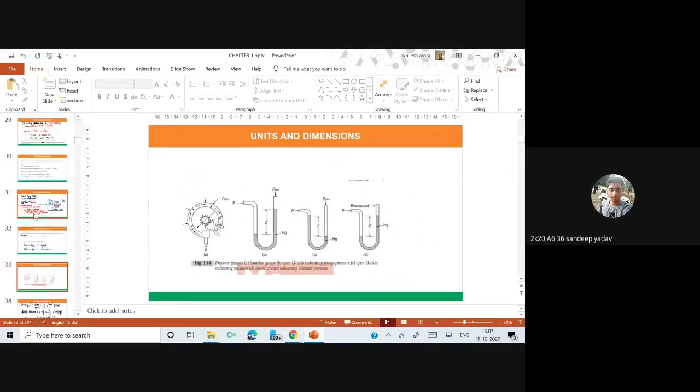Okay, so this was the question actually. I think we left here only, isn't it? I think so, I am audible I think. Yes sir, okay. So this was the question.

So basically what we have to do is calculate the mass, and we have to use the equation PV equals MRT. This is the equation we have to use.

Now the question somebody asked was, shall we go for 20 bar, or should we take the absolute pressure? This is the gauge pressure. Shall we take absolute pressure or shall we go for gauge pressure?

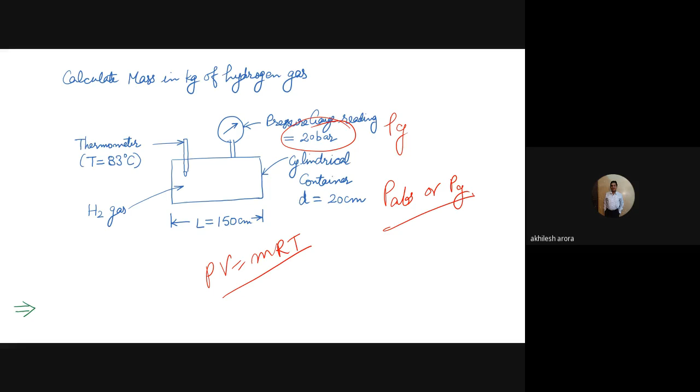Now suppose if I am having this particular container and the gauge shows a pressure which is equal to 0, then what is the pressure inside the container? Atmospheric pressure, 1 ATM. It is atmospheric pressure.

So would hydrogen be there inside the container or not? Yes sir, it would be there. So that means when the pressure is atmospheric, the hydrogen would be there. And there is a pressure of the gauge which is showing 20 bar, so in totality you can say the total pressure is 21 bar. So we have to calculate the mass of the hydrogen for 21 bar, not for 20 bar.

Because at 1 bar also... sir, 21 bar? Why sir, ATM, 1 ATM pressure we have right? See, I am just giving you an example, actually I will be taking the exact value when I solve it.

Okay, so let us see now. So we have to go for 20 bar plus 1 ATM, that would be 21.01325 bar. Okay, so let us see how we are going to solve it.

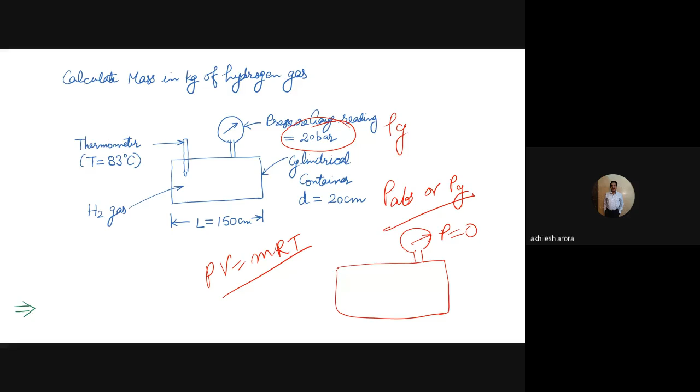Now this is once again, I have written this question, so you can see we can use this particular equation. You already know about it. And then this is the relationship for the mass.

So first of all, let us calculate the various parameters or physical properties involved here: pressure, volume, R, and T. Absolute pressure is given by atmospheric pressure plus gauge pressure, so 20 plus 1.01325 bar gives us 21.01325 bar. That is the total pressure inside the container.

Then if I convert this value into kilopascals, I will have to multiply this value by 10 raised to power 2. So it gives the pressure as 21.01325 into 10 raised to power 2 kilopascals. I hope this part is clear to you. So we have calculated the pressure now.

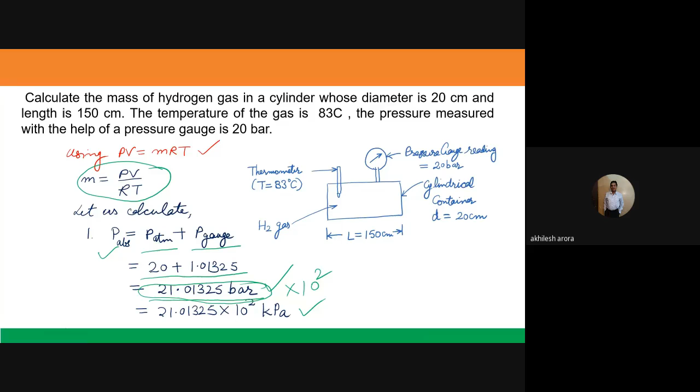Now let us go to the second part, which is the volume. I know what the volume is. Volume is pi by 4 d square into L. This is a cylindrical vessel, so this will be the volume.

So you can put the values: 22 by 7 divided by 4. This is the diameter, 0.2 into 0.2. The diameter is 20 centimeters, so you can divide by 100, that will give you the value in meters.

I think somebody is trying to join. Just wait for a minute.

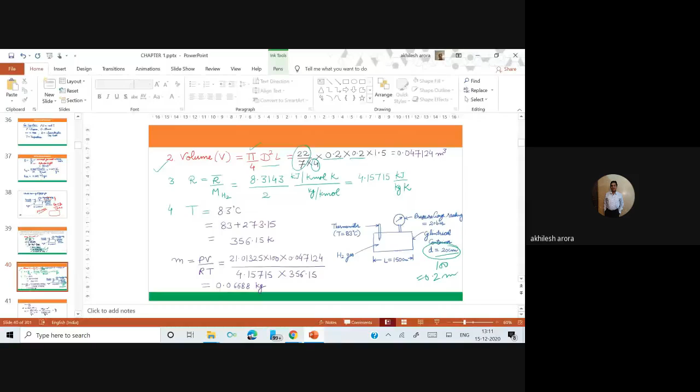So now you can see I have taken the value of diameter in meters here, and 1.5 meter is the length here. 150 centimeters converting into meters is 1.5 meter, and this is the value of the volume I get. So you can cross check, if it is wrong you can tell me.

The third part is the characteristic gas constant R. So R stands for characteristic gas constant, and its value is equal to the universal gas constant divided by the molecular weight of hydrogen. You can see it here, this is the value, and you can see the final units: kilomole and kilomole cancels out, so we are left with the units kilojoule per kg Kelvin.

So unit system is very important for you to understand, because if you are using the wrong units, you won't be able to get the correct answer. Then when I go for the temperature, it is 83 degrees Celsius, but in this equation we will have to take it in kelvins.

So I add 273.15 and get the value of the temperature in Kelvins, which is 356.15. So I have calculated the pressure, volume, R and T. Now I put all the values and the final answer comes out to be this.

0.06688. So this value, pressure is in kilopascals, volume is in meter cubes, this is the value of R, and its unit is kilojoules per kg Kelvin, and here the temperature is in Kelvin. So I have chosen this particular set of units, and then I have got the value of mass in kgs, actually. So it is 66.88 grams.

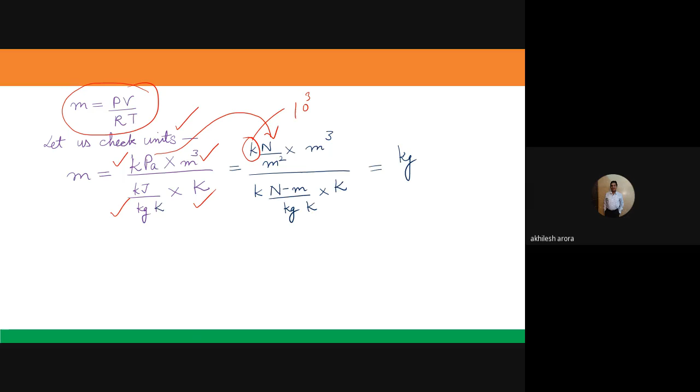So you can see Pascal, if I calculate, is actually Newton per meter square, and kilo is just its prefix, showing the value is 10 raised to power 3. Then this is the value of volume. In the denominator also it is kilo, and joule, if I take joule, is actually Newton meter. So I have written that value as Newton meter per kg per Kelvin, multiplied by Kelvin.

Now you can see here, the Newton and Newton will cancel out, this meter square and this meter will cancel out, this Kelvin and Kelvin will cancel out, and this meter will cancel out with this meter. So we are only left with kgs, and this kgs will go up here, and we will get the value of mass in kgs.

So basically I have considered a consistent set of units, comprising pressure taken in kilopascal, volume taken in meter cubes, temperature in Kelvin, and the value of R in kilojoules per kg per Kelvin. So this is the consistent set of units. So when you take these units, the final value of mass will come out to be in kilograms.

So consider if the mass is given to you in kilograms and you are asked to calculate the pressure. If you take all other values in this consistent set of units, then the pressure will come out to be in kilopascal.

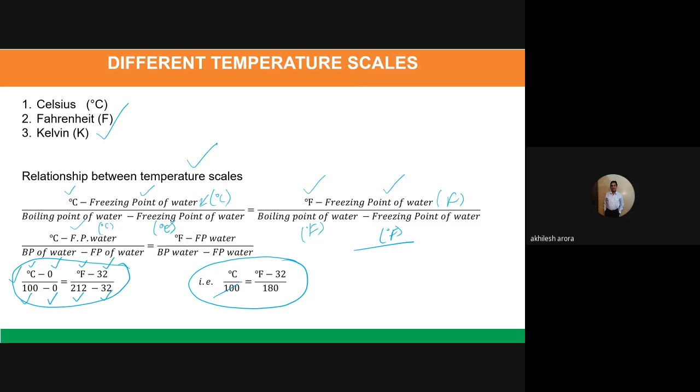So if you are given the temperature in Fahrenheit, you can convert that into Celsius. Finally, this is the relationship: degree Celsius divided by 100 is equal to Fahrenheit minus 32 divided by 180. You can convert Fahrenheit into Celsius and Celsius into Fahrenheit using this relationship. You can also divide it, it becomes 5, it becomes 9.

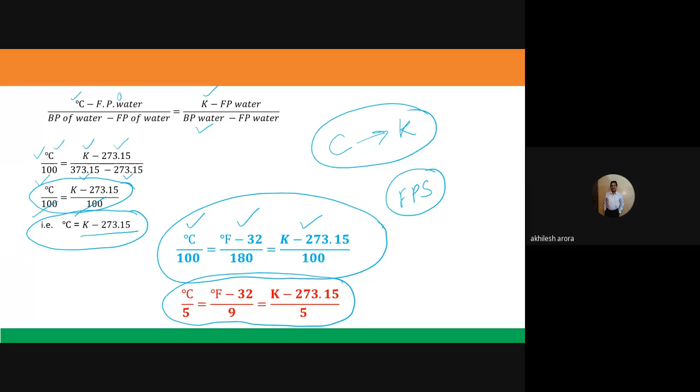But mainly when studying this case, mostly you will have to convert Celsius into Kelvin. We will be using this mostly. Fahrenheit is normally not used because it is the FPS system of units, and the FPS system is not used here in India. We are only using the SI system of units.

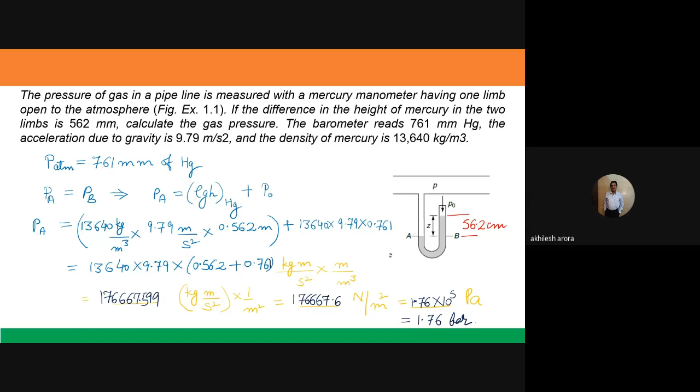Here I have also given the solution, so better you can see it yourself. If you have any problem, you can ask me later on.

So basically till now we have completed chapter number 1. In chapter number 2, I told you about the zeroth law of thermodynamics and the various temperature scales. Now we are going towards chapter number 3. Chapter number 1 is over, and chapter number 2, whatever I wanted to tell you, I have told you. Now this is a very important chapter, work and heat transfer. Let us discuss about it.

A closed system and its surroundings can interact in two ways: one is by work transfer and another is by heat transfer. These may be called energy interactions, and they bring about changes in the properties of the system. Suppose you have a closed system, a vessel containing a particular gas. If you heat it, its temperature will increase, because the volume of the vessel is constant. When the temperature increases, the pressure of the gas will also increase. So these are the energy interactions which bring about changes in the properties of the system.

Thermodynamics mainly studies these energy interactions and the associated property changes in the system. This is the definition of thermodynamics, which I told you in the first class of thermodynamics.

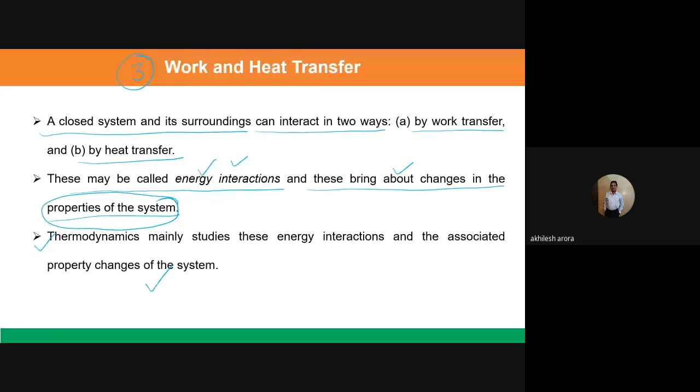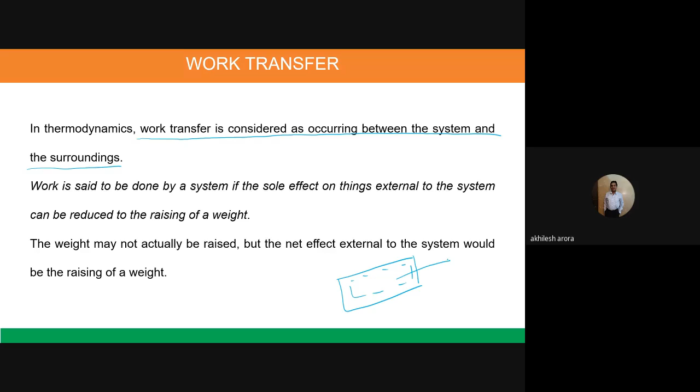In thermodynamics, work is considered as occurring between the system and its surroundings. This is very important. Work transfer is considered as occurring between the system and the surroundings. When I say this, it means work is observed when it crosses the system boundary. If this is the closed system and this is the surrounding, if the work is starting here and going out, only then can we say it is work transfer. Otherwise we will not call it a work transfer.

You should focus here, work transfer. Transfer is a very important word here. You won't call it only work, or only heat. It is heat transfer and work transfer always. Now this is the definition of thermodynamic work.

In physics, when we talk about work, we say W equals F dot S, where F is force and S is displacement, and their dot product gives you the work. But in thermodynamics, the definition is different. Here we say work is said to be done by a system if the sole effect on things external to the system can be reduced to that of raising a weight. So whatever the effect this work is going to do, if with the help of that effect we can raise the weight, then only we can say that work is done by the system.

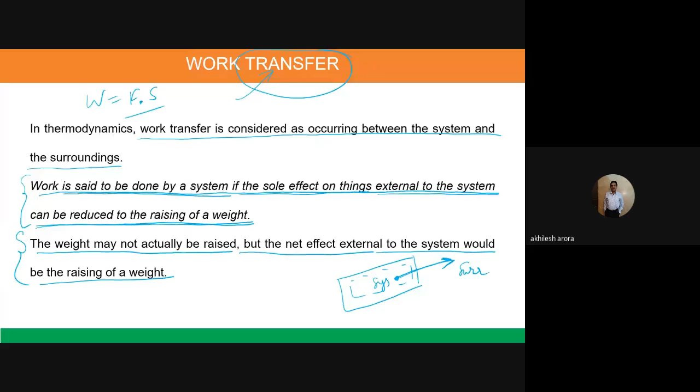Now focus here. On the left hand side diagram, you have a battery with two terminals, positive and negative, and with these terminals we have attached a motor, and with the shaft of the motor we have attached a fan. So this fan is driven by the motor, and the motor is getting energy from the battery, and this fan exists outside the system boundary. The boundary is here - within it you have the battery and the motor, but the fan is in the surroundings.

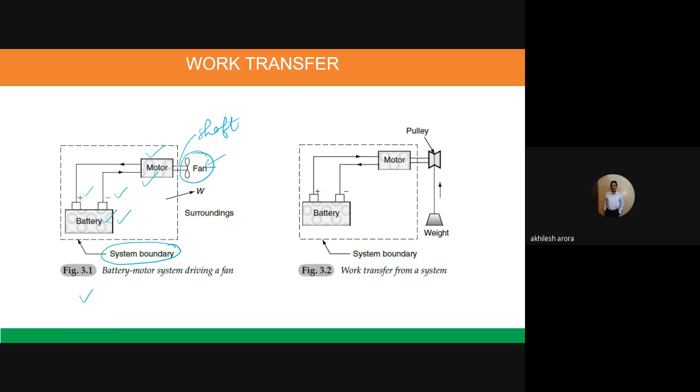So can we make some change in this system so that we can find out that this system is doing work? Actually this system is doing work. There is work transfer because there is motion of the shaft, and this motion of the shaft can be converted into raising a weight. You can see this in the right hand side diagram.

So what we have done is removed this fan, and in place of that we have installed a pulley. When this motor moves, its shaft rotates. There is a rope over this pulley, and at the end of the rope there is a weight. So when the shaft rotates, the pulley rotates, and the rope will be lifted up. When the rope is lifted up, the weight will also be lifted up. That is the definition of work transfer in thermodynamics.

So what we have done is converted a battery and motor system comprising battery, motor and fan, into a battery, motor and pulley, and this pulley is able to raise the weight. We never take lowering of the weight, because lowering of weight can occur because of the mass of the weight itself, or because of the motion of the body. So we don't take lowering of the weight as work transfer. Raising of a weight has been done in this case, so we have arranged the system such that the weight has been lifted up, and we say that work transfer is taking place.

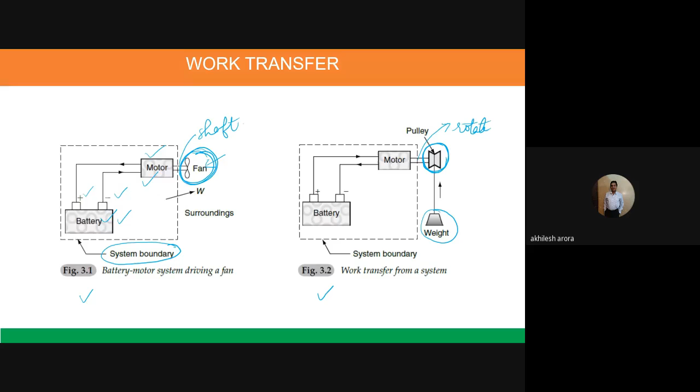Now, one very important thing: when work is done by a system, it is arbitrarily taken as positive, and when work is done on the system, it is taken to be negative. So this is the system and the work is moving out of the system - this is positive for us. So when the system is doing work, it is positive.

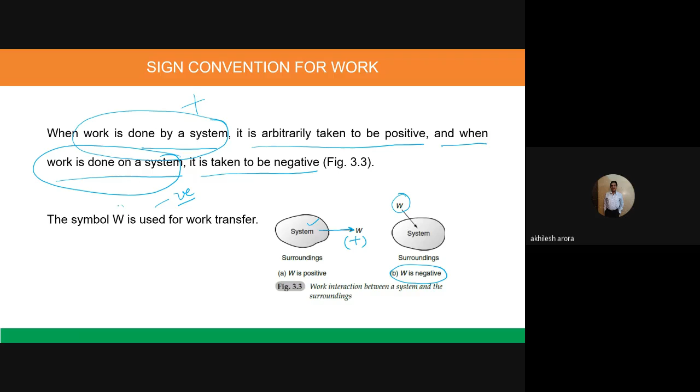When the system is doing work on the surroundings, work is positive. When the surroundings are doing work on the system, it is negative. But remember, don't think of it as from system to surrounding or surrounding to system. Rather, work done by the system is positive, and work done on the system is negative. So these are the two terminologies we will use, and we will use the symbol W for this.

Now let us discuss the various types of work. This is the first type: it is PDV work, or displacement work, in a simple compressible system. You should try to understand this terminology.

What is the meaning of a simple compressible system? It basically comprises a piston and cylinder arrangement - that is one example. Otherwise, if you have a balloon, it's also a closed system, since a balloon can be compressed or expanded. So that is also a simple compressible system.

When we talk about PDV work or displacement work in a simple compressible system, our focus is on a closed system where the boundary is flexible. In a piston cylinder arrangement, the boundary can be flexible, or if it is a balloon, the boundary can also be flexible, because when we fill air into the balloon it inflates. Similarly, the piston can move either inwards or outwards, so the boundary can vary.

So you can see it here. We have a piston cylinder arrangement, and this is the initial position of the piston, point number 1. The pressure of the gas inside is P1, volume is V1. The gas has been considered as the system only. The boundary is shown here, encompassing only the gas. So gas is the system here, its pressure is P1, volume is V1, and temperature can be T1.

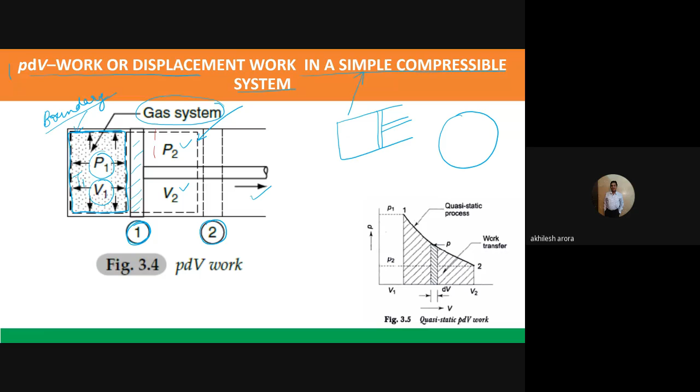Now, due to some reason, if the piston moves outwards, as shown, it reaches this particular position, and now the pressure is P2 and the volume is V2, and the boundary, being flexible, has reached the new position. Earlier it was here only - this is the initial position of the boundary. Now the final position of the boundary is up to this location.

Now let us see this particular diagram. I have shown both positions here - this is position number 1 and this is position number 2. I have tried to plot these two positions of the gas on the PV diagram. So here the pressure P1 is here and the volume V1 is here. Here the pressure is P2 and the volume here is V2.

Now what I consider is some location here, BB. At this location, when the piston is at BB, the pressure exerted by the gas is, let us say, P. Now suppose this piston moves to the new location C, and the displacement is dl. One more thing: A is the cross-sectional area of the piston. So focus on three items only: at location BB, the pressure exerted by the gas is P; due to this pressure the piston moves to the new location with displacement dl; and the area of cross section of the piston is A.

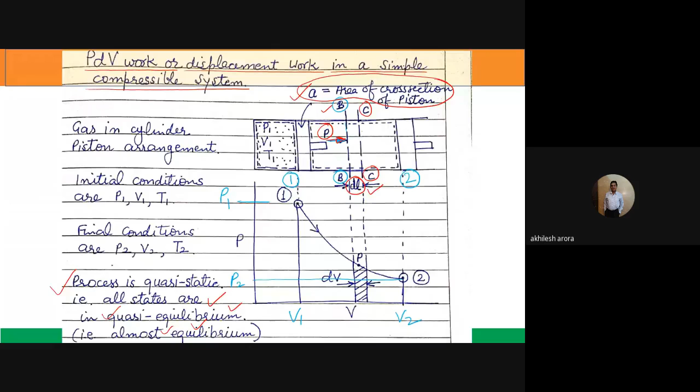Now you see it here. What is the force which is acting on the piston actually?

You can see this is the pressure which is acting at this particular location P. Area of the piston is A. So if I have to calculate the force on the piston, I can multiply pressure and area. So P into A gives me the force which is acting on the piston at this particular moment, at this point B, B or C, C.

During this displacement, the pressure is P and the force is P into A. So you can see the units also. Pressure has the units Newton per meter square, area has the units meter square. So meter square and meter square will cancel out, and the value of the force will come out to be in newtons.

Now during this motion from BB to CC, there is a very small or infinitesimal work which is done by the piston, and that work can be given as F dot dl. This infinitesimal work I am representing as delta W. It is something like this, delta W. So it's a small work. I am not representing it as dW, I will tell you the reason why later on. For the timing, we are not going to use this dW, we will be using delta W. And this is equal to F into dl.

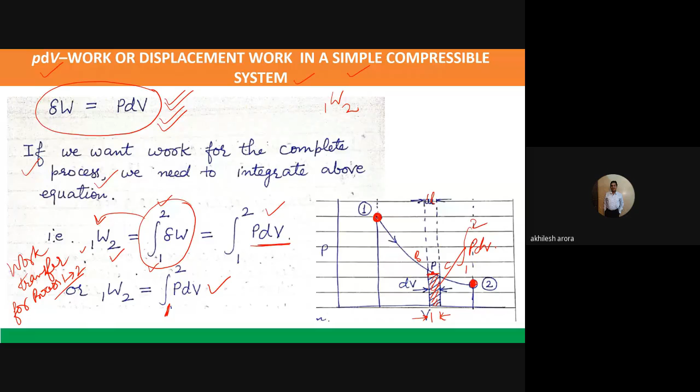Now, there are some conditions for which this relationship is valid. Which relationship? W1 to 2 is equal to integral PdV. The above equation is valid for, number 1, closed system. This I have already told you. Second is quasi-static process. And the third is when there is external resistance at the boundary, not pressure, external resistance at boundary.

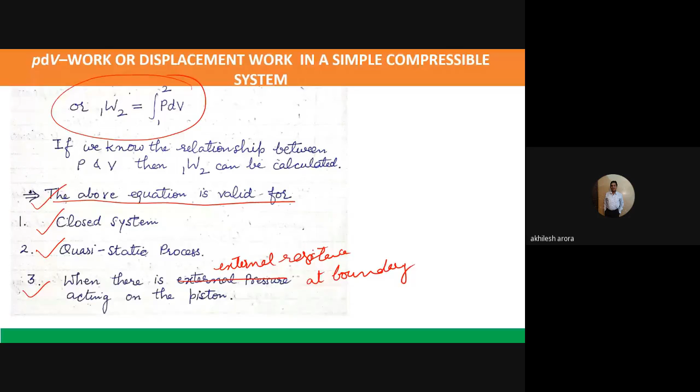So can you tell me, is there any external resistance at the boundary? This is the question for you. Yes sir, the atmospheric pressure. Atmospheric pressure, yes, it is the atmospheric pressure which is acting on the boundary actually. You can see here in the diagram also. What is the external resistance? This is the P atmospheric which is acting here. So it is P atmospheric. So if this P atmospheric is now not there, then what would be the name of this particular process? Anyone? Free expansion. Yes, it would be free expansion. If there is no pressure, that means there would be vacuum actually. And in case if there is vacuum, then it will be free expansion. The expansion of a gas against vacuum is known as free expansion.

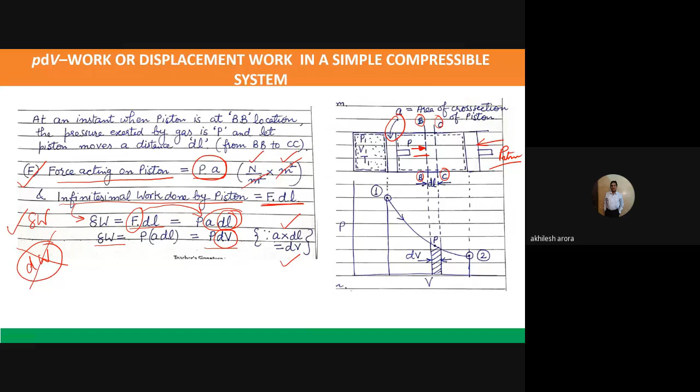So let us proceed further. Now we can use this particular equation, delta W is equal to PDV, for various processes. Now, what are the various processes?

The various processes which a simple compressible system or closed system can undergo are: the first one is the constant volume process, also known as isochoric. The second one is the constant pressure process, isobaric. Third is the constant temperature process, also known as isothermal process. Fourth is the reversible adiabatic process, represented by PV raised to power gamma is equal to constant. And the fifth one is the polytropic process, represented by PV raised to power n is equal to constant.

When I say constant pressure process or isobaric process, there is another name also, it is actually isopiestic process. Once again, if you see serial number 4, I have written reversible adiabatic process. But if I see the other names, constant volume process, constant pressure, constant temperature, or polytropic process, nowhere have I written reversible.

But for your information, when I say constant volume process and I am calculating the PDV work, there is already the condition that it has to be quasi-static, and only a quasi-static process is a reversible process. So when I say constant volume process or isochoric process, even if I am not using reversible isochoric process or reversible constant volume process, it is meant to be the same actually. So it is only reversible constant volume process or quasi-static constant volume process. This you should always keep in mind.

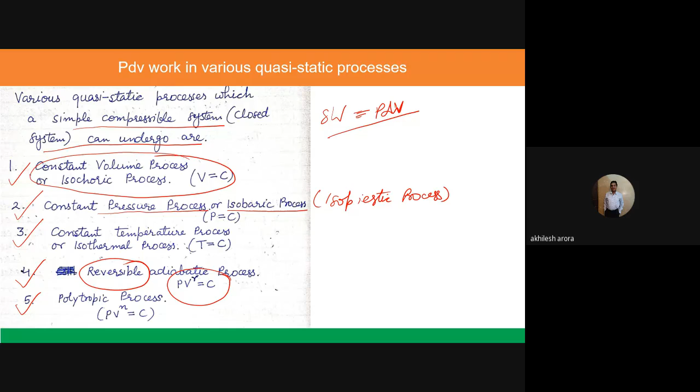So all the remaining processes where I have not used reversible, they are deemed to be reversible. So they are quasi-static in nature actually. Only then can we use this particular equation of delta W, which is equal to PDV.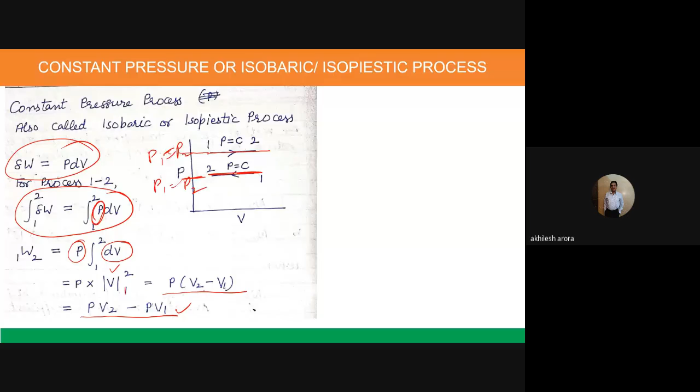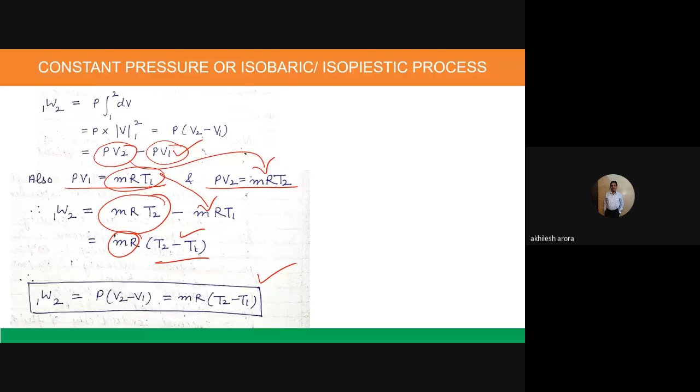So once again, I have the gas equation PV1 is equal to MRT1 and PV2 is equal to MRT2. This is the gas equation I am using. So PV1 is equal to MRT1, which means I can replace PV2 by MRT2 and PV1 by MRT1. So MR into T2 minus T1 gives the value of work transfer in case of isobaric process. W1 to 2 is equal to P times V2 minus V1, which is equal to MR times T2 minus T1.

Now let us talk about the isothermal process. You have studied this in 11th class physics, so it's not difficult. In isothermal process, PV is equal to MRT. This value is constant, since MR is constant for a particular gas and temperature is also constant, so the right hand side is in totality constant. So PV is equal to constant, or P1V1 is equal to P2V2 is equal to P3V3. All these are constant in this isothermal process, where temperature is constant, or PV is constant.

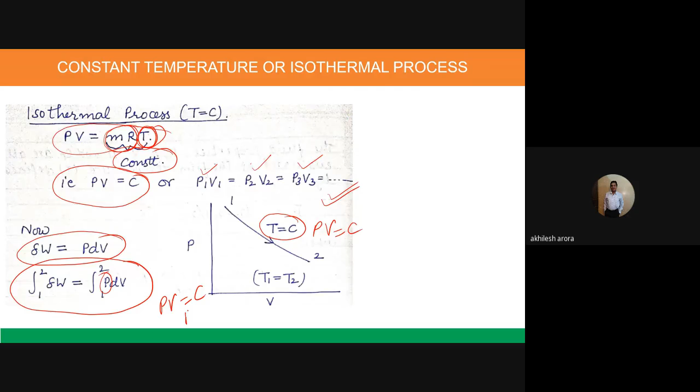So I can use this equation and integrate both sides from 1 to 2. If I have to calculate the value of P, I have PV equal to constant, so P comes out to be C by V. The work transfer will be given by the integral of C dV by V, since PV is equal to constant and P is equal to C by V. C can be taken out of the integration sign, so you are left with C log V2 by V1.

This value of C is either P1V1 or P2V2, since they are the same. So work is given by P1V1 log V2 by V1, or P2V2 log V2 by V1. In place of P1V1 I can also write MRT1, and MRT2 for P2V2. Since P1V1 is equal to P2V2, we get V2 by V1 is equal to P1 by P2. So in this equation, the log term V2 by V1 can be replaced by P1 by P2, giving W1 to 2 equals P1V1 log P1 by P2, or P2V2 log P1 by P2, or using MRT1 and MRT2.

So we have 8 expressions basically for calculation of work in case of isothermal process. The first one is P1V1 log V2 by V1, which I can replace using P1 by P2, or write as MRT1, MRT2, or P2V2. So whatever is given to you, you can write the expression according to that value.

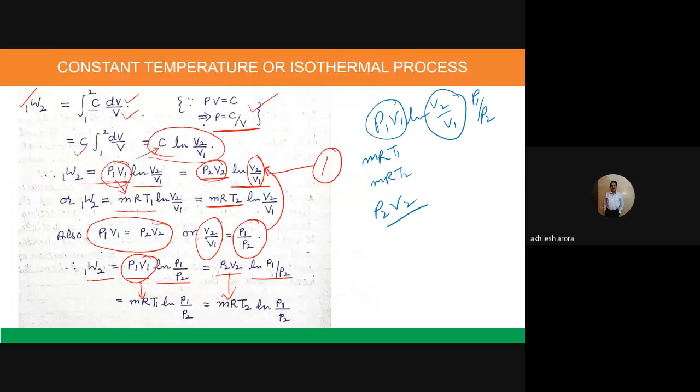Now proceeding to the next process, the reversible adiabatic process. You must already know this relationship, that in case of a reversible adiabatic process, PV raised to power gamma is equal to constant. There are some other equations also: TV raised to power gamma minus 1 is equal to constant.

Gamma is nothing but the ratio of specific heats, Cp by Cv, and the value of gamma is equal to 1.67, 1.4, or 1.33. This is for monoatomic gas, this for diatomic gas, and this for polyatomic gas. So we have different values of gamma. If we take air, the value of gamma is 1.4.

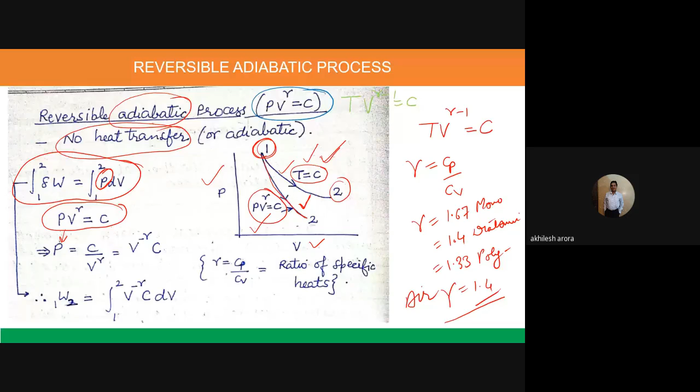That comes out to be C upon V raised to power gamma, and I can say it is equal to V raised to power minus gamma into C. And this, I have already told you, is the ratio of specific heats.

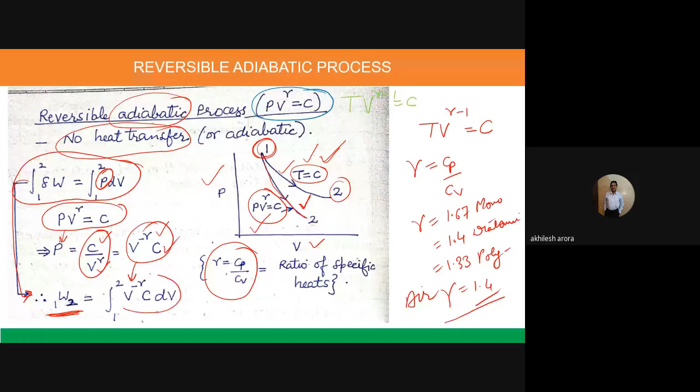So from this equation, W1 to 2, the work transfer for process 1 to 2, is equal to the integral from 1 to 2, with pressure now replaced by C over V raised to power gamma. So I have kept this value in place of pressure. Remember this equation so I can explain it on the next slide.

So what I have done, since C is constant, I have taken it out of the integration sign. The expression becomes 1 to 2, C V raised to power minus gamma dV. So this is W1 to 2. Now you can integrate it.

I hope you understand the integration here. When we integrate V raised to power minus gamma, we add plus 1 to the power and divide by the same value, with limits from 1 to 2. So it becomes 1 minus gamma, taken out of the brackets.

This is C, and here we get V2 raised to power minus gamma plus 1, minus V1 raised to power minus gamma plus 1. In the next step, I have multiplied this value inside the brackets, giving C V2 raised to power minus gamma plus 1 minus C V1 raised to power minus gamma plus 1, over 1 minus gamma.

This is the reversible adiabatic process, where PV raised to power gamma equals constant. That means P1 V1 raised to power gamma equals P2 V2 raised to power gamma.

So what I have done is substitute this value of C into this expression. Since we are having V2 in the first term, I will take P2 V2 raised to power gamma, multiplied by V2 raised to power minus gamma plus 1.

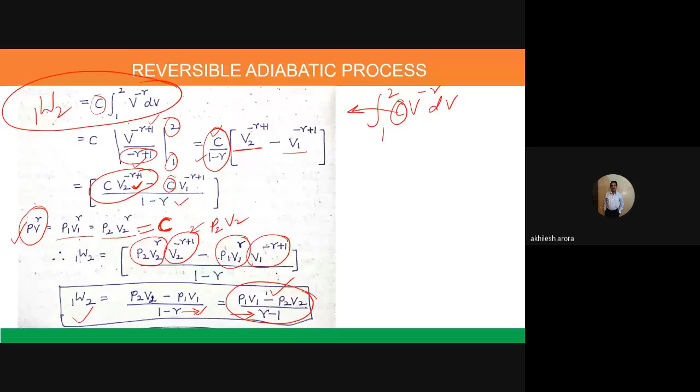Any questions? No, sir, no. So as you have seen, all these integrations and derivations we are doing verbally.